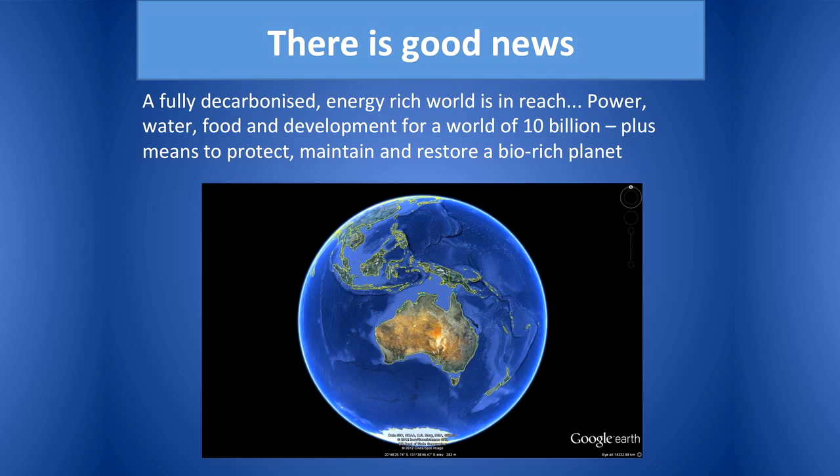I want to start with some good news because there is some good news, and the good news is that a fully decarbonised, energy-rich world is in reach. There is no technological obstacle to that outcome, and that would mean power, water, food and development for a world of 10 billion people, plus the means to protect and maintain and restore a bio-rich planet. This is good news. We should never lose sight of this possibility.

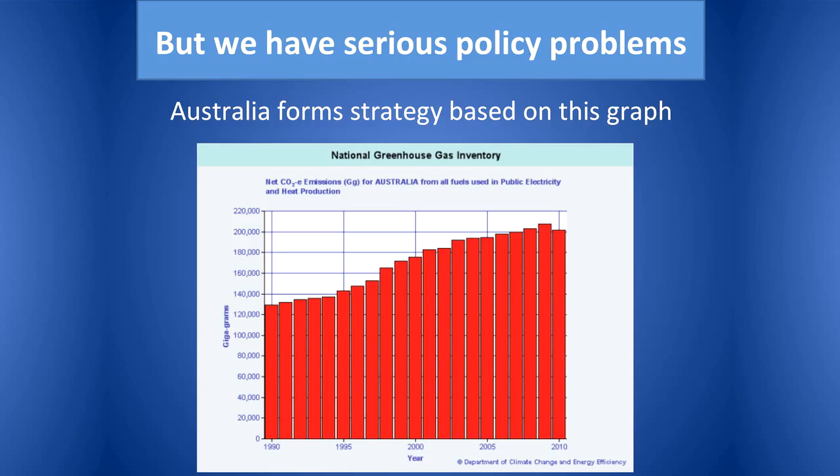However, we have some very serious policy problems that we're going to need to kick over in order to realise that. To give you some idea of the policy problem, I would like to show you this graph and point out that Australia forms climate change strategy based on the message that you can take away from this graph. Now, this graph shows the greenhouse gas emissions from electricity generation in Australia one year to the next. This gives the impression that if you start reducing these emissions and those bars start going in the other direction, that we're getting somewhere and that we're doing the right thing.

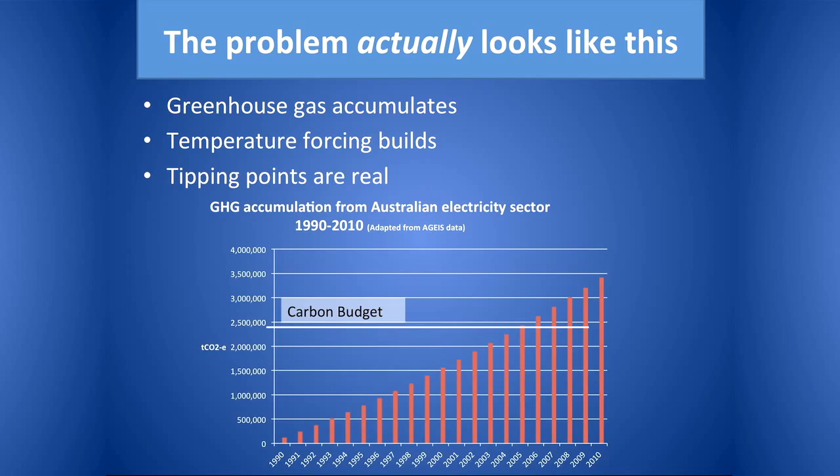That's what's happening. And what we're seeing now, unfortunately, is tipping points appear to be very, very real for us, not even in the latter part of this century, but in this century. Overlaid on that, we have a global carbon budget. Now, where it is, we're not quite sure. Maybe it's there, maybe it's down here and we've already blown it. But the fact is it's a zero-sum game, and the job is to stay within the carbon budget. That means that the pathway to where we're going matters as much as the destination.

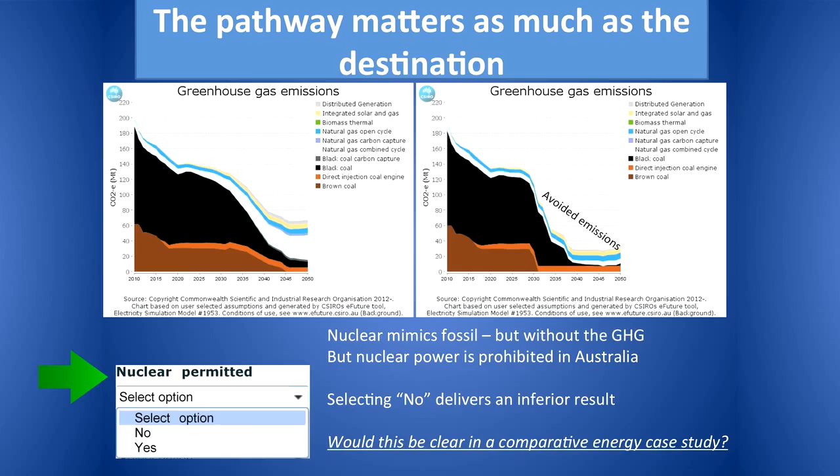Now, these graphs come from the tool which has recently been released by CSIRO called eFuture. There's one difference in the criteria between these charts, and it's that box there. Nuclear permitted, select yes or no. And it generates those two different outcomes. And that's because nuclear mimics fossil fuel but without the greenhouse gas. It does the same job. But nuclear power is at present legally prohibited by two acts in Australia. So selecting no, either in this tool or in national policy, is guaranteed to deliver an economically and environmentally inferior result. And I wonder what it would look like if we did a single comparative case study of this.

And that brings me to this report, Zero Carbon Options. That's exactly what we've done. A single case study examining two zero carbon energy options for a single task. The task that was set was in fact defined by the report that preceded us, called Repower Port Augusta, where they set themselves the job of replacing the Northern and Playford power stations.

These stations have a generating capacity of 740 megawatts. They've been responsible for up to and over 5 million tonnes of greenhouse gas every year. They're a significant contributor to South Australia's greenhouse gas. And the electricity generation target is 4,650 gigawatt hours per year. Now, we've clarified that we think replacing those power stations means not just that quantity of electricity, but delivered reliably when we need it, dispatchably, which is what the coal-fired generation does.

So we've compared 2 options. A reference renewable option, which is a solar and wind generation hybrid. This comes from the source report, Repower Port Augusta. This is not our suggested pathway for renewable. This is the option that has been put forward by others.

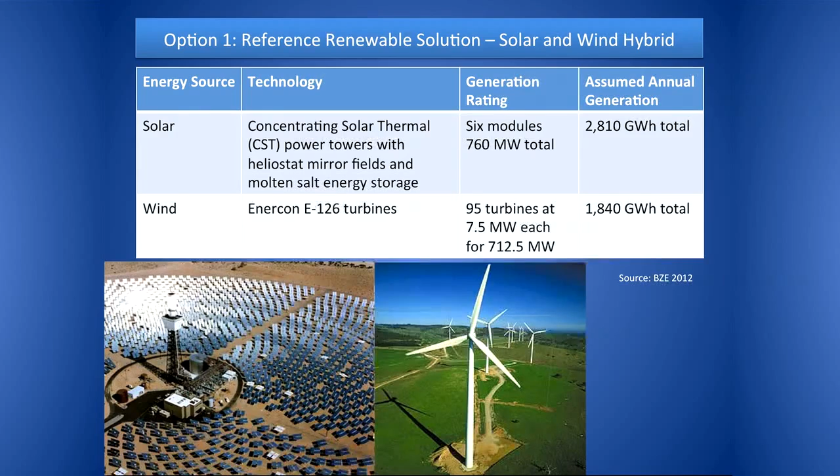It combines concentrating solar thermal power towers with heliostat mirror fields and some energy storage in molten salt. 6 of those modules for 760 megawatts to give 2,810 of those gigawatt hours that are needed. And it pairs that with 95 7.5 megawatt wind turbines to make up the balance of the electricity generation. Those 7.5 megawatt wind turbines are the very largest turbine in the world, a very new turbine and the very largest.

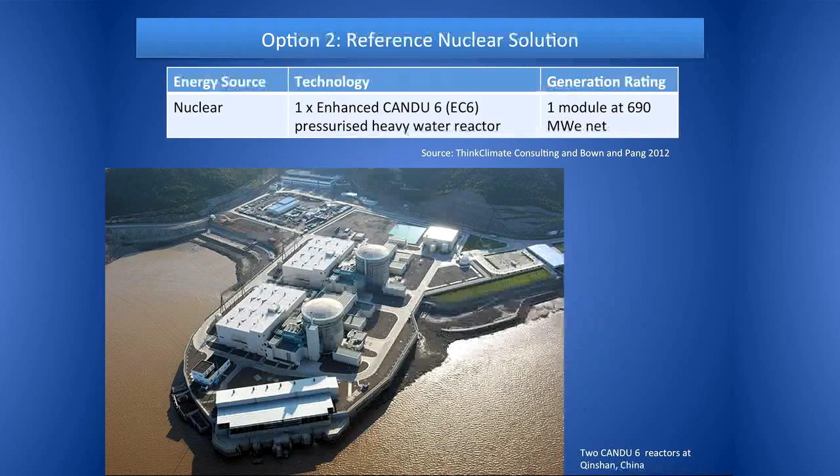Option 2, the reference nuclear solution, we've selected one enhanced CANDU 6 EC6 pressurised heavy water reactor. The generation rating for that plant is 690 megawatts. The image you can see there is 2 of those units side by side, recently constructed in China. I think they were commissioned in 2005. You can see them there side by side. Our replacement task only requires 1 of those.

Firstly, capital cost. Reasonably important. However, the reference source document for the renewable solution didn't provide it, which makes things difficult. Obviously, if we wanted to do a comparison, we would have preferred to have drawn directly from the report, but it wasn't given. I'm not quite sure why that is. You might be able to make your own inferences.

They did make one comment in there that they were seeking $5 billion in public funding in order to make up a 25% balance of financing, from which we were able to infer a capital cost for the solar component. No capital cost was provided for the wind component at all. We went with a low range estimate, not bottom, but low, of $2,000 per kilowatt installed in South Australia to generate that wind cost.

For nuclear, we were able to draw on 3 sources of potential costs. They were highly inclusive costs. Not a lot is being left out at that capital point here. And we generated a range for $5,000 to $7,000 per kilowatt of generation installed. So what we got was $6.7 billion for the solar component, $1.4 for the wind, for a total of $8.1 billion for the hybrid renewable solution, and a range of $3.5 billion to $4.8 billion in capital for the reference nuclear solution. So that was our starting point for capital cost.

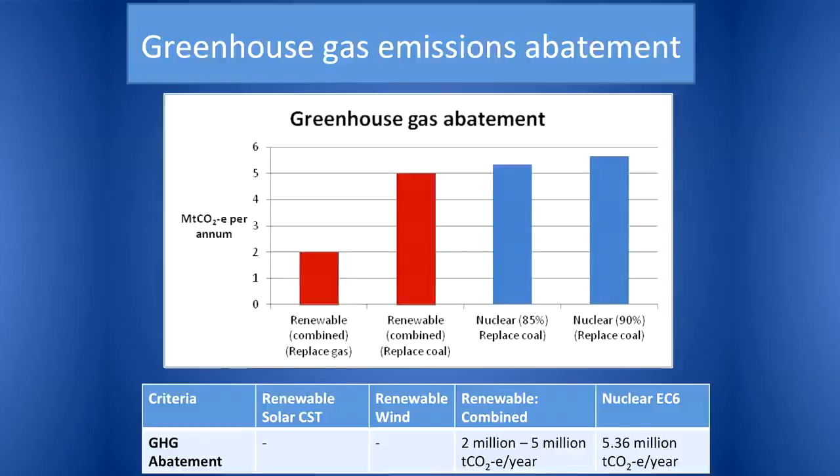The nuclear, we can be far more confident because it actually would, like for like, replace the function as well as the production of the coal-fired power plant. And if we were running it at 85% capacity, we actually exceed that generation target by quite a little bit. That would mean we could potentially export a little more electricity to Victoria, where they use very dirty electricity, and we actually achieve more abatement.

So we can achieve 5.36 million tonnes versus the 5 if we run the nuclear at 85% of its capacity, and we can do even better than that if run at 90, for which it is rated. But we went with the assumption of 85%.

In terms of the lifespan, when you're kicking around $4 to $8 billion, this is probably a fairly important criteria. In terms of concentrated solar thermal, it's actually difficult to say because we don't have a great deal of experience globally with this technology yet at all. And there will probably be some difference between the lifetime performance of the mirrors and the towers and the collection and the storage technology. That may well differ from the performance of the generators, for example, which would not necessarily be that different to a generator attached to any other form of thermal plant. So we were limited in what we knew there.

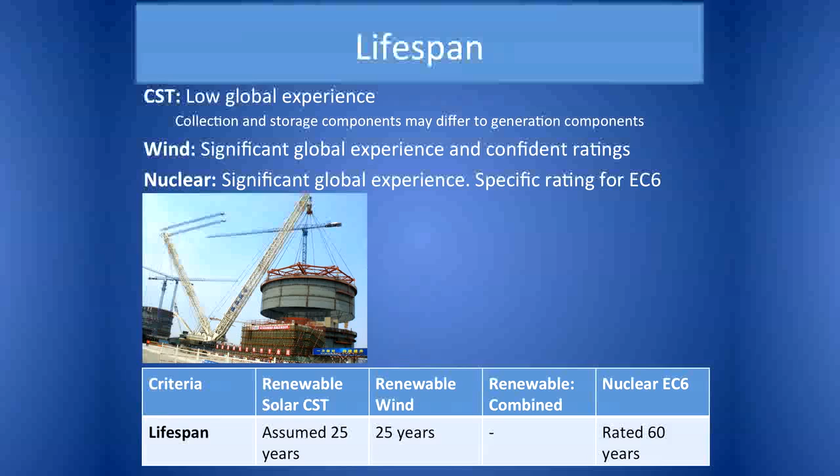With wind, we've got significant global experience now with wind, and we can be quite confident in the rating there. Similarly with nuclear, we also had the benefit of specific rated lifespan for the reference solution, which was handy. So we assumed a 25-year life for the solar thermal, 25 years for the wind with good confidence. That's about what wind delivers. The nuclear reference solution is rated for a life of 60 years.

Moving on now to the operational waste. This is where we see a clear distinction between the two. In terms of the hybrid renewable reference scenario, there is essentially zero operational waste. Not completely zero, it's a power plant, but for the purposes of our analysis, it's essentially a zero waste form of energy production. For the reference nuclear solution, this is the type of nuclear power station that does generate spent nuclear fuel, which is classified as high-level nuclear waste. A single EC6 running for 1 year generates 104 tonnes of spent fuel, and that would be stored on site in a storage system called MACSTOR.

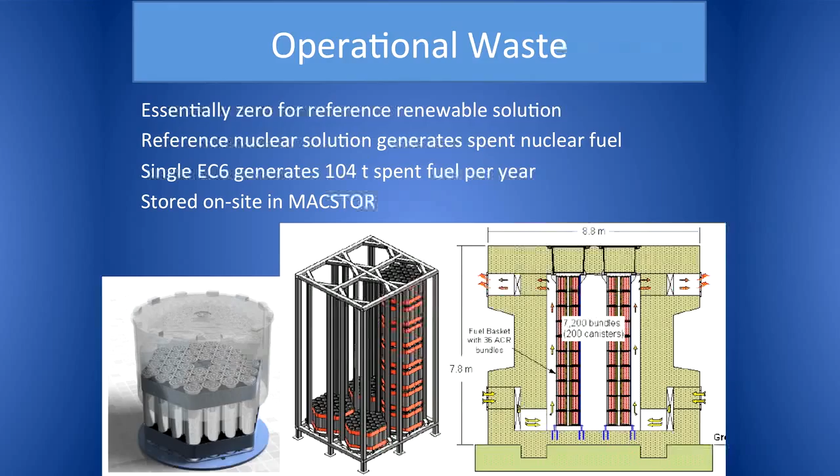I guess when people worry about people stealing spent nuclear fuel, I'm not quite sure they grasp that it's as dangerous to a terrorist as it is to anyone else. So picking it up and running away with it's kind of difficult. And unless you have the Incredible Hulk on payroll, I'm not sure how you're getting into one of those devices. That's how it's stored on site.

So in the lifetime of the EC6, the 60 years, it would produce 6,250 tonnes of that spent fuel in MACSTOR storage. That requires an area of 9,500 square metres, which is approximately a soccer field. So to put that in perspective, if you think of the playing surface at Hindmarsh Stadium, that's the size of area required for the lifetime storage of the spent fuel.

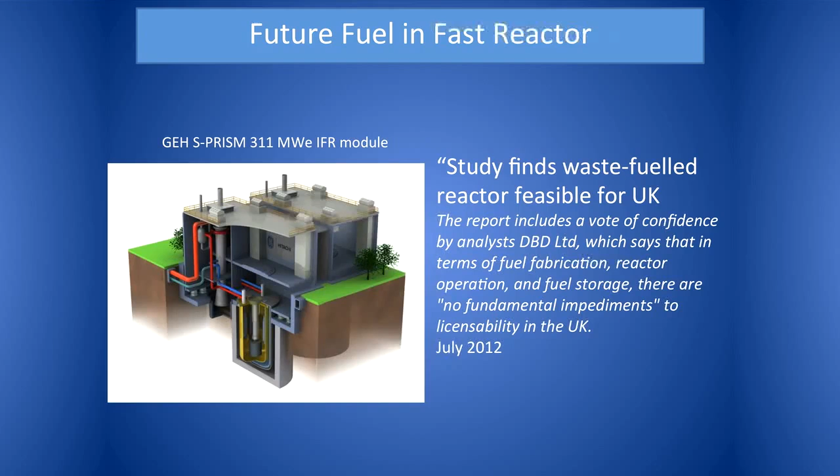Now, what many of us know, and hopefully soon all of us will know, is that well within the lifetime of this reactor, that fuel can be recycled so that a further 99% of it is used to generate zero carbon electricity in a Generation 4 fast reactor called here a PRISM. General Electric at the present is petitioning the UK government actively to let them build one of these reactors to help the UK government dispose of an unwanted stockpile of separated plutonium.

They are so confident in this that they did go ahead with the feasibility study, which has shown no obstacle to licensing. And they even said to the UK government, don't pay us to build this, we will build it and then we'll charge you per unit of plutonium that we get rid of and per unit of zero carbon electricity that we generate at the same time. So they have a very, very high level of confidence in building this technology, and they want to do it now. So I think any presumption that we would be stuck with that spent nuclear fuel indefinitely is simply not correct.

In terms of land use, as I showed you before, we have these 2 units of EC6, or in fact it's CANDU 6, the enhanced CANDU is the evolution, but 2 units of CANDU 6 at 1360 megawatts here, shown in China. That is the currently largest solar power station in the world in the United States, known as SEGS, rated for 350 megawatts. So you can see we're getting 1,360 megawatts on essentially a spit of land in China, and you can see the landscape scale of attempting to make baseload power using the sun.

There is plenty of sunlight, but it's very dilute or dispersed, and the challenge is actually capturing enough of it and storing it and concentrating it, and that takes up a lot of space. The exact numbers provided are that the renewable solar option would require 16 square kilometres of exclusive land. So if you've run the City to Bay, then you've run 3/4 of the perimeter, would be one way of thinking about it.

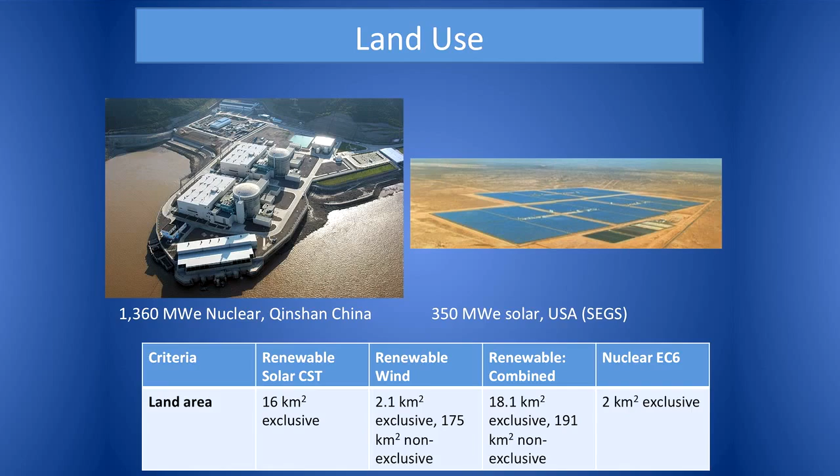The renewable technology, you can think in terms of the exclusive and non-exclusive use. In terms of exclusive use being the footprint of the actual turbines, the service roads and the buildings, it's about 2.1 square kilometres. In terms of the entire project area that encloses all of the individual turbines, it's a very large area, about 175 square kilometres. The nuclear, we have selected 2 square kilometres based on taking the area of that plant shown and about 70% of that area, because we only need 1 of the units. So quite a big difference there in that criteria.

Water consumption is something that people are often curiously sceptical of, I guess, in terms of nuclear power. A wind turbine essentially is a zero water energy producer. The blade is being spun and energy is being generated from the turbine. The solar thermal and power towers will require clean water for washing the mirrors every year, but they have stated in the reference case that they would be air cooled.

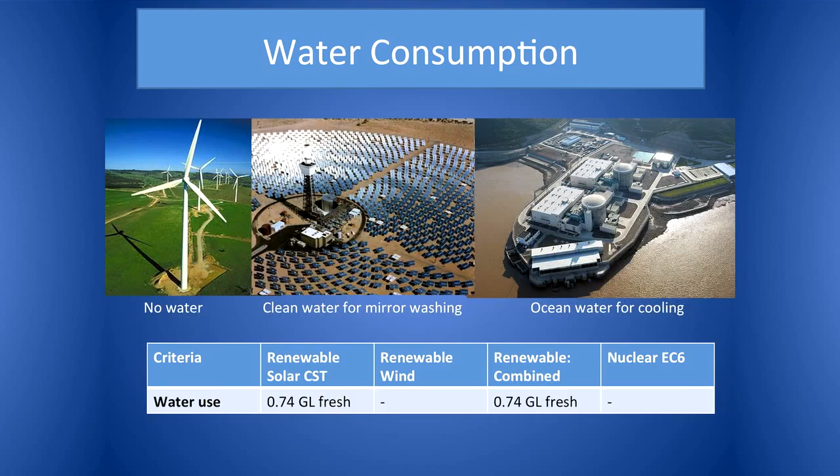The present setup in Port Augusta is ocean water cooling for the thermal power stations, and that is exactly what is happening here. So there is essentially, under the nuclear reference scenario, no change in the current water arrangement, which isn't drawing on any freshwater supplies. So I guess we need to distinguish between water consumption and potable or potentially potable water consumption is more the point. So the renewable solution does require 0.74 gigalitres of fresh water annually. The other 2 types of energy generation are not competing with potable water.

Material inputs. Again, we use this criteria mainly in order to perhaps address a common criticism of nuclear power, not necessarily because we feel that this criteria should make or break the energy decision, but we do think there's some interesting information here. But again, the quality of the information was a little varied. In terms of the concentrating solar thermal, the reference report for the renewable solution gave us information for the heliostats only and not the towers. So I guess fair confidence there, but it's certain to be an underestimate.

In terms of wind, there is good general literature. However, we didn't have anything specific to the Enercon turbines, so I guess we'd call that good. With the nuclear option, we had very detailed and extensive estimates for the CANDU 6 from that construction project in China.

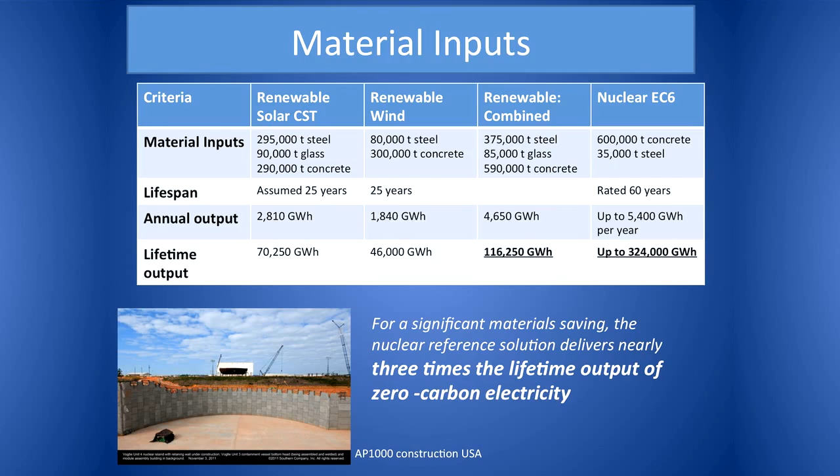But if we go back to both the lifespan and the annual output, we know that we're getting longer life and higher output out of the nuclear plant, in both cases by quite a lot. So the bottom line is that under those assumptions, we actually end up with 3 times the lifetime output, or nearly 3 times, of zero carbon electricity for that input of materials. So to consider that criteria in a way that is appropriately contextualised, we need to take that into account.

Capacity factors, this is our next bit of jargon, but again, important jargon. The capacity factor is a ratio. It's a ratio of what a generator could produce according to its rating if it were running non-stop all year versus what it does produce. So in a nutshell, it's one divided by the other. Example there of a wind turbine, if it was capable of producing 65,700 but it instead did produce 21,900, the capacity factor given would be 33%. That's about typical of a wind turbine.

Now that speaks to the overall variability in the intermittency. It doesn't mean that it only runs 33% of the time. That's not the way capacity factor should be interpreted. Again, fortunately we had very clear information here. 30% assumed for the wind, 40% for the solar thermal. The nuclear EC6 is rated to about 90%, but for our analysis we assumed 85%, which is basically starting to give you the clue that the nuclear is a highly reliable way of delivering electricity.

Which brings us again to reliability, which is in words probably the longest section of the report in terms of the criteria analysis. So we've gone into quite a bit of detail in the report. I'm going to try to sum it up in the simplest possible way I can here with a slide, which is this. Solar plus wind doesn't equal coal. So it is not the case that you can simply merge or hybridise 2 intermittent, climate-dependent generating solutions and provide the same service as a coal-fired power station. You may provide the same quantity of electricity. There is no assurance of providing the same service.

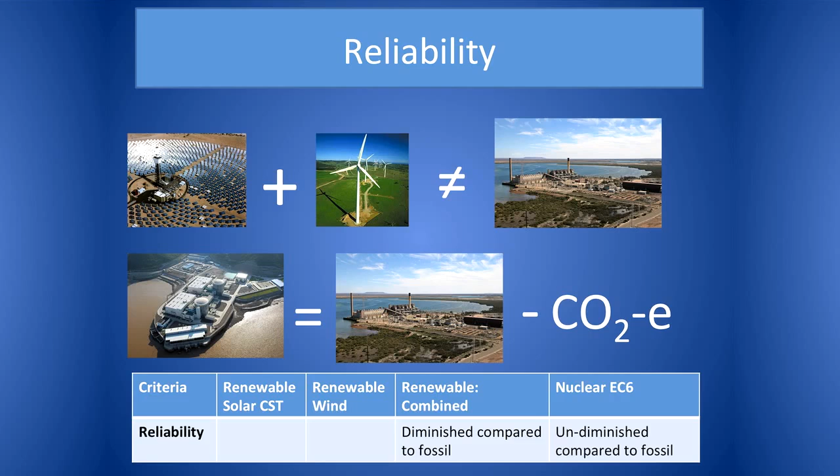Nuclear, for all intents and purposes, equals coal minus greenhouse gas. Here we are providing both the quantity of electricity and the service in terms of fully dispatchable, always available electricity that is highly reliable. Bottom line being that under the renewable reference scenario, South Australia's electricity supply would have diminished reliability, and under the nuclear scenario, it would be undiminished reliability.

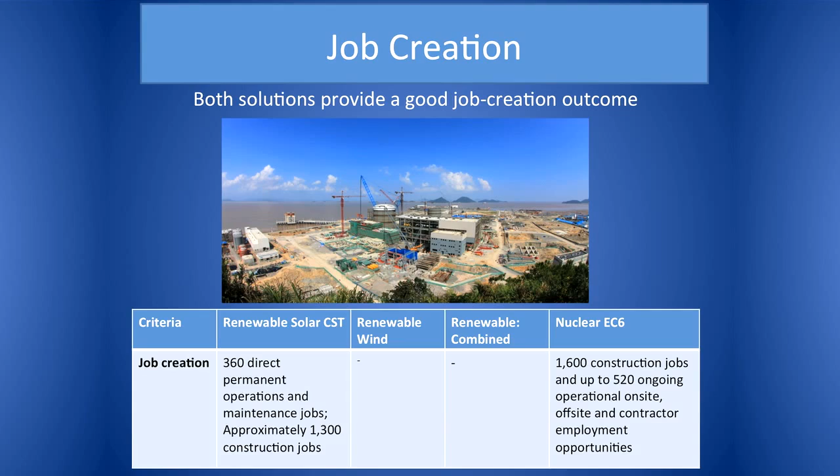In terms of job creation, again, for us, this is not a make or break criteria for how the decision ought to be made, and it would appear from the information that was available that both options provide a good job creation outcome. That should be expected when such sums of money are being spent. That's not any particular surprise, but certainly the nuclear does provide a very healthy job creation outcome, and certainly the ongoing jobs are some pretty enticing ones.

Network enhancement refers to any challenges of actually getting these solutions connected. And there's a little bit of interesting story to tell here. In terms of the renewable solution at the local level, i.e. where we would want to plug it in, there is no specific barrier identified. In that region, the infrastructure that is there would probably cope with what's being provided to it. And we undertook some consultation with ElectraNet, and they were able to confirm that.

On the broader picture though, the sheer size of this in terms of new intermittent capacity being added to South Australia would suggest that we would need to be moving towards this green grid situation of network interconnection with the other states in order to actually share this electricity in an economically efficient way.

Already with the high penetration that we have of wind in South Australia, there are negative price events occurring. That's another way of saying overnight so much electricity is being produced from the wind that it's exceeding demand. The price of electricity drops below zero and electricity is essentially being dumped. That's a consequence of progressing to higher and higher levels of penetration of a generation source that is intermittent in the way that wind is.

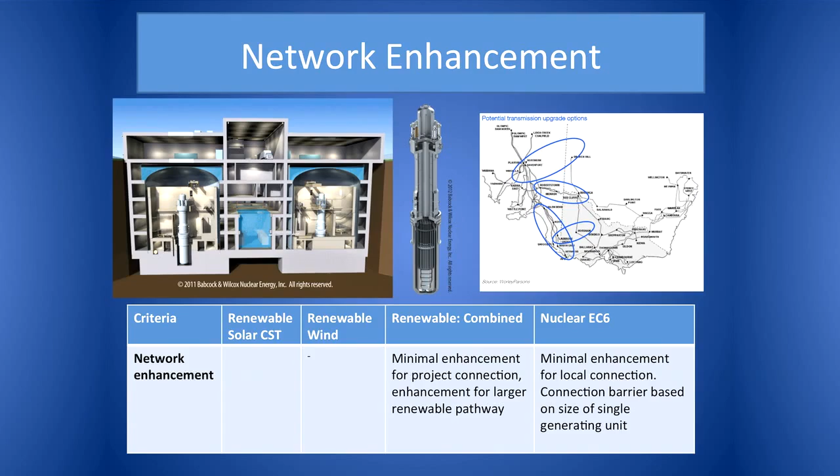So you can see in that image on the right, that's taken from WorleyParsons' Green Grid report for the South Australian Government, identifying potential interconnection. So with such a large addition of intermittent capacity, I think it's very probable that it would need to accompany that. The nuclear solution has a different problem, and that's the size of the single generating unit.

So bear with me here, but at the moment, the South Australian grid is permitted to lose up to 260 megawatts of generation at a time. In a single contingency event, that's how much it can lose. That's how much it's regulated to lose. It's modelled at the moment to be able to lose up to about 650. It's not modelled to lose beyond that, which is another way of saying that because the EC6 is 680, it's too big to plug in at the moment. The coal that it's replacing, Northern and Playford, is actually split up into 3 separate generating units, the largest being 260. So that's that regulated limit.

So there are ways around that, which is either the enhanced interconnection, new large sources of demand in South Australia, or perhaps investigating what I've shown here in an image, which is small modular reactor technology, where the single generating unit is at 180 megawatts. That would be no problem, and you could run a few of them in a series to get that outcome. So there would be potentially ways around that. Interesting message, though, I guess, out of that is that an enhanced network is good for all comers. Everyone benefits from a better, more interconnected network.

Finally, the existing global and local capacity. We wanted to get a feeling for how challenging it might be overall to get these technologies going on the basis of how commercially mature they are. So if we were to deploy the nuclear solution in Australia, this would be nationally significant because we have not done nuclear power yet in Australia. Globally, however, that would be entirely manageable. It wouldn't be far off trend currently with growth of nuclear, and technologically it would be completely unremarkable. This is very mature technology.